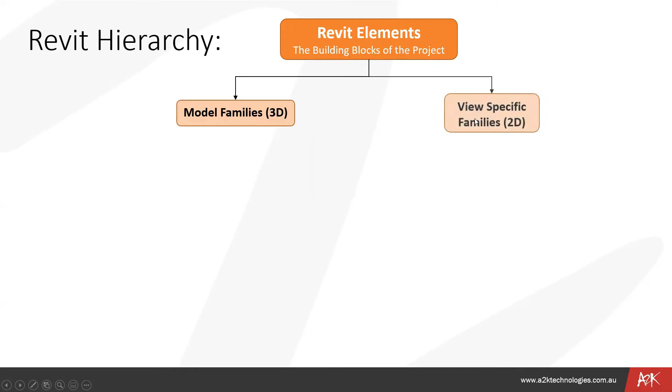Just to break that down a bit further in terms of what a Revit family is - basically anything that we would load into our projects, be it 3D or 2D, would ultimately in some way, shape, or form be referred to as a Revit family. Under your 3D components, we've got the system families, being walls, floors, roofs, ceilings, etc. The component families, which is what I would say most of my time is spent creating - these are your .rfa files that can be downloaded and plonked into your project.

Detail component families and annotation families like tags and symbols, etc. And then, bridging that gap between 3D and 2D, we also have the in-place families, which is kind of a standalone modeling space that you would use for specific project items.

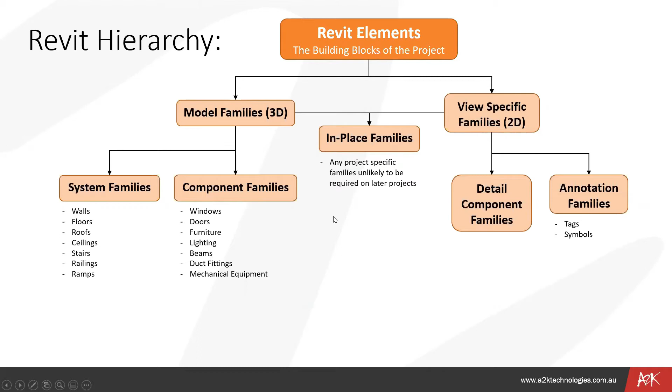I wouldn't say I spend too much time in the in-place families creation zone, but I suppose the core concepts of this consistent approach to content could very easily apply to all of this stuff.

Ultimately, everything that we create and put into our project brings in with it all of the data, all of the materials, all of the subcategories, if there are any, into this project. And that's important because Revit is essentially a visual database. So as with any database, if we put garbage in, we're going to get garbage out.

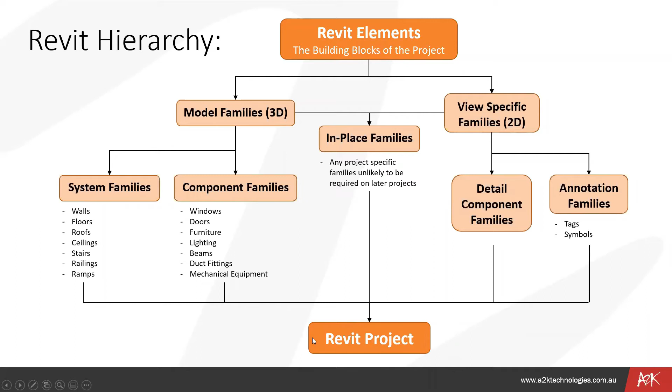That's something to consider, because a lot of different places that you'll go to for Revit content are created by a range of different people, with their own ideas of how to best do it. Some don't really care, and that gets dangerous because all of the back end stuff that lives in that content will ultimately come in and occupy space and memory in that project.

So when I'm talking about creation standards, there are a few real world applications, or examples I should say. This note here is just what I was touching on, as in any of the materials and the geometry, etc., that we have in the files we are putting in our projects, they ultimately end up in those projects. For that reason, it's important that we adopt and maintain a level of consistency when it comes to building these Revit components.

That might be region specific, it could be industry specific, or it could be specific to your design firm. It could be all three, it could be a combination. So it doesn't have to be an existing standard that's out there and available, it could be one that you create from scratch. It's just important that it is applied and adopted across the entire company.

Essentially, this is going to mitigate a lot of issues that you would see come time to populate your project with these objects. So when we're talking about consistency, this should be across a lot of things, and this is just a handful, not everything, obviously, but in terms of the level of detail, the quality of the content, the naming - that's quite important, and I'll show you why - the materials and any shared parameters. These are all things we should really have consistency across a complete library.

And then we have BIM-MEP AUS, which is more targeted at the services area - so this is like your HVAC, your plumbing, your electrical manufacturers. But needless to say, these have got standards that go along with the content that's built.

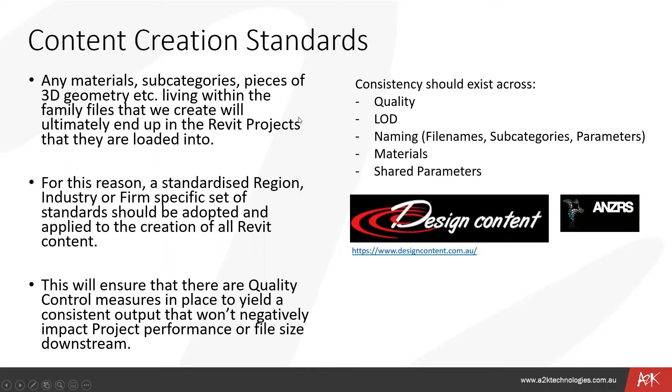For example, with design content we would use what's called the ANZRS, the Australia New Zealand Revit standards. With that, we have a range of shared parameters that live within the ANZRS ecosystem, and there's some guidelines around naming of files and best practices around content creation. BIM-MEP AUS, same thing - a separate shared parameter file, and if anyone's scratching their head about shared parameters, I'll dig into that shortly. But these are just a few examples of some existing standards that live out there.

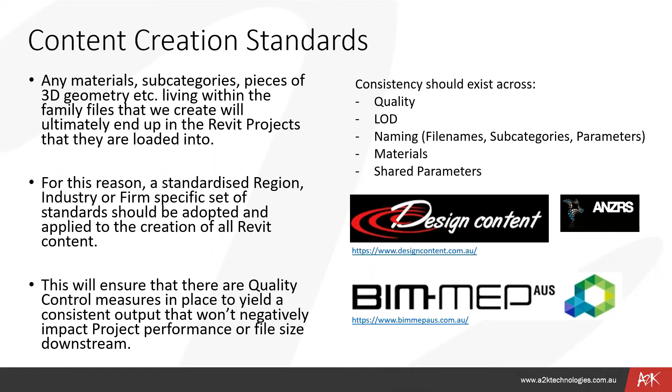But as I mentioned, this could be just as easily something that you would come up with yourself and batch apply to all of the content that comes out.

So what happens if content creation standards aren't applied to the families that you're creating and putting in your projects? Firstly, your projects will end up with a lot of unnecessary stuff loaded in. So this is going to ultimately impact your performance of your project and make the managing of the BIM a lot more difficult. You're just going to be swimming in more information, a lot of it unnecessary, and that becomes a problem downstream. You'll have difficulty finding families or family types or materials that exist within your project.

Again, it's just coming back to, well, firstly, naming of things can make that tricky, but also, the more you have in there, the more unnecessary stuff you've got in, the harder it is to find. Time is going to be wasted setting up and entering schedule information, and that sort of comes back to the shared parameters stuff, which I'll touch on. You won't get consistency or clear identity data in your documentation.

And you're going to end up wasting time graphically changing things in views just to get it to be readable. So rather than building it consistently and correctly from the outset, you're kind of going to have to do some sort of in-project fudging to make things look right, but they aren't necessarily right if someone was to open that file and have a look. So I'm guessing at least some of these are probably going to sound familiar to some of you out there.

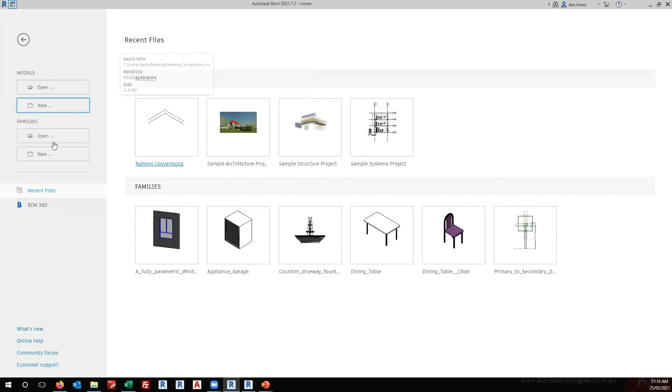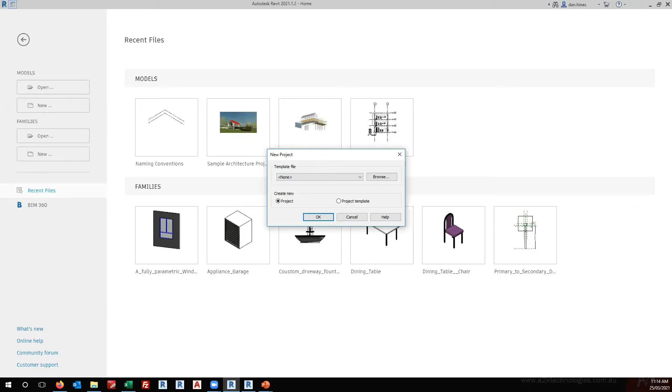So I'll just start a new project, and this is probably the best way to get a fairly good picture of what comes in with your families, because it is easy to just dump these in and sort of out of sight, out of mind. But when we start a new project, we have the option to select a template file, which I'm just going to say none, which is essentially going to bring in the bare bones. If I started it with an architectural out of the box template, it's going to bring in some walls, etc., which I don't want for the purposes of this test.

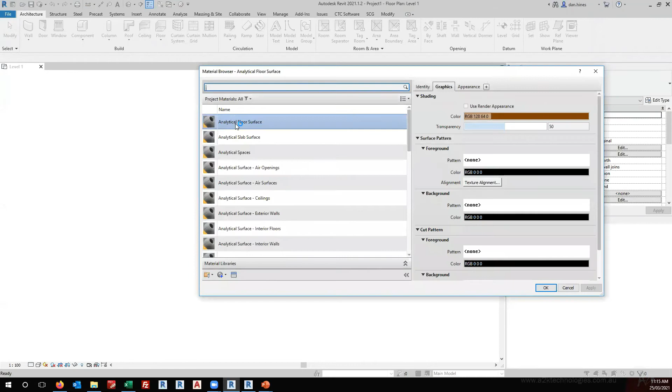What I'm then going to do is I'll just open the material editor here, and there is some stuff that still comes in even though I haven't selected a template, which I'm just going to delete. Hit OK. I'm then going to come into my Manage tab and purge unused, and I'll just do this a couple of times to make sure so I've got 0.

So what we've got here now is very much a bare bones project. There's no materials. There shouldn't be any subcategories. There shouldn't be any families other than the ones that have to be in here as placeholders. So this is kind of a good test to see and understand what is coming in with your content.

So I've just got a folder here, and this is just content that I've downloaded off an online resource. From the jump, we can see there's no real logical file naming here, which straight away is confusing to me because there's capitals, there's no structure to the file name, which we'll go into in further detail shortly. But the main thing I want to capture here is when I bring this into my project, and this shouldn't take very long because it should all be the correct version.

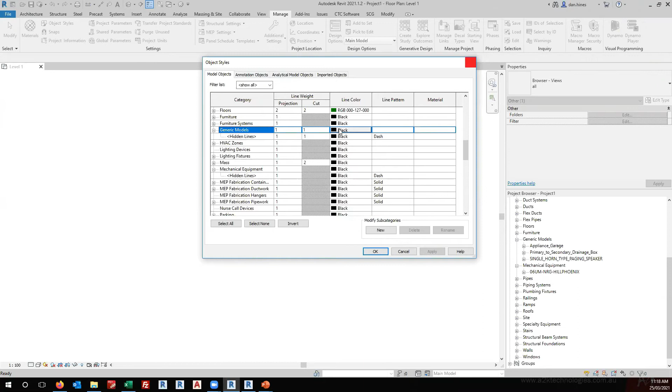is the object styles. So if you're ever wanting to test what is coming in with your families, and make sure that they're clean and only using what they need to, starting a new project without a template applied, purging everything out, including the materials that are living in the material editor, and then bringing in your content and seeing what comes in is a good way to tackle that.

So in terms of finding the families or those materials that exist within your project, sorry, I know there's going to be a bit of jumping to and from Revit here, so apologies in advance. So this is when a logical naming convention comes into play with not only your families, but anything. A good example of this, if I was to open this project here, as you saw in this folder, it's kind of a mess in terms of the file names.

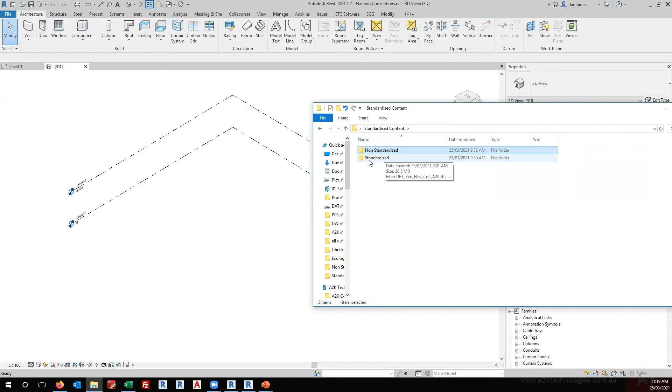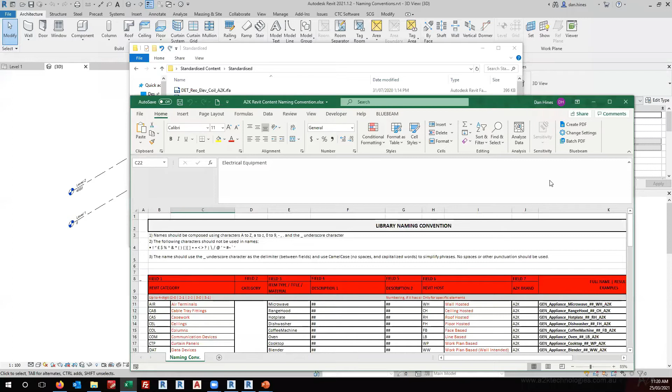So if I was to jump over to an example of some content that we've created here to do with the structural space, and I'll just go to details so we can actually see. We've developed, and I'd encourage you all to do the same if you don't already have one in place, a naming convention, which I'll share in my Excel here. So this is the way that we've used it. A general rule of thumb for naming content and materials is you typically want to work from most general to most specific, going from left to right. And I'll explain why shortly.

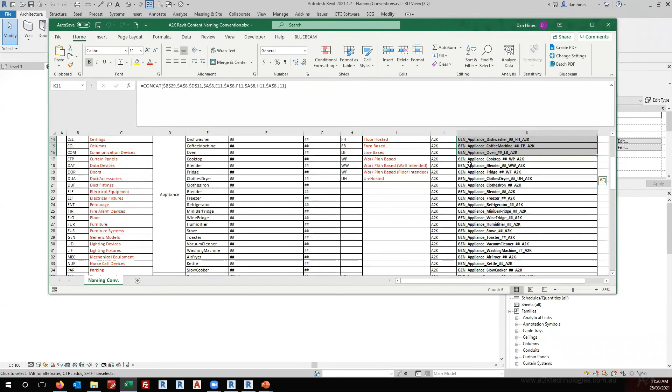But to break down our naming convention in this example, we typically start things off with the Revit category. That way, we're grouping by Revit category. We're then applying a subcategory, whether that is appliance or storage, and there's some examples over here. So a generic appliance, microwave. We have some descriptors if need be. They might not necessarily always need to be there. And then if you wanted to, you could also have hosting options, because some things may be face-based or line-based or work plane-based, etc.

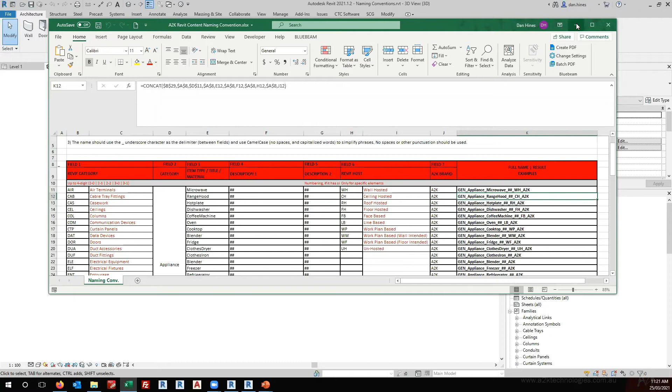So how this ends up working is in the context of a library that I've just dumped a whole bunch of content in, it starts to separate things out logically, as will it in the project browser, by firstly my category, which Revit should automatically do anyway, because we've got the predefined Revit categories that these should go into. But this is more for accessing and finding the content outside of Revit itself. This 3-digit category identifier is useful in that respect.

So we're starting from the Revit category. We're going across to whether it's Reo, slab, columns, beams. Within that, we have beams in situ, precast, steel, timber. So we're getting more and more specific as we go from left to right. And this is intentional because what we end up with is all of our beams sitting together, all of our steel beams sitting together, and then from there the individual profiles, which are unique. We've got all the timber beams sitting together, all the columns sit together, etc.

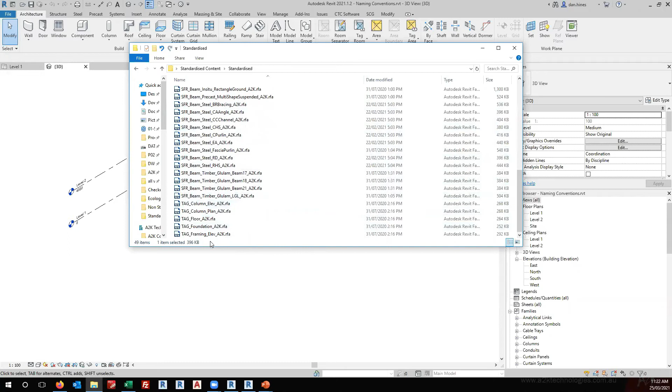So this is exactly the same for materials, as you saw back in, and I don't think I saved it, but did I keep it open? This project here. As you can see, there's no rhyme or reason as to how these materials have been named. So trying to go through and find a material could be pretty problematic and not necessarily a logical process.

If I was to come back in here where I've loaded in all that content we had in that standardized folder, the same principle applies in terms of naming the materials as with the families themselves, in that we have the overarching material type being concrete, metal, plastic, or wood in this case, and that one should not be there.

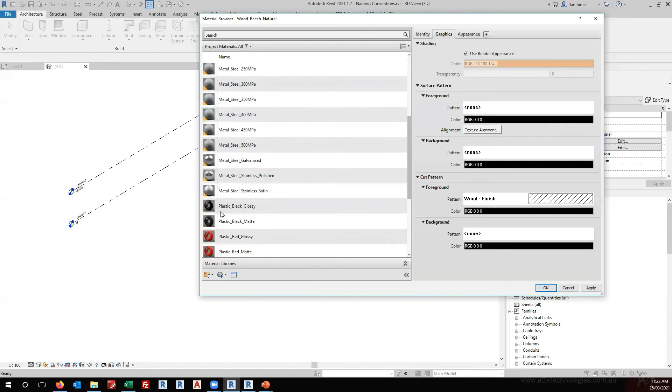Then within those categories, we've got whether that metal is aluminium, copper, steel, etc., and we get more granular as we go across. So how we end up with it is a really logical way of browsing our materials and our families, in that we just logically go from left to right, ultimately ending up with a finish of a specific color of a specific material. So that's sort of a useful tidbit.

And the other thing that you'll notice here, we're not using spaces, we're using underscores to separate the different things, and that's intentional as well. We want to limit the use of spaces if possible. This not only visually breaks it up, but I would recommend avoiding spaces at all if you can in terms of file naming or material naming.

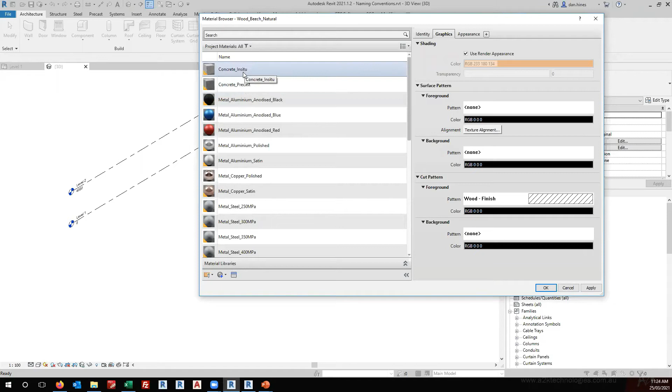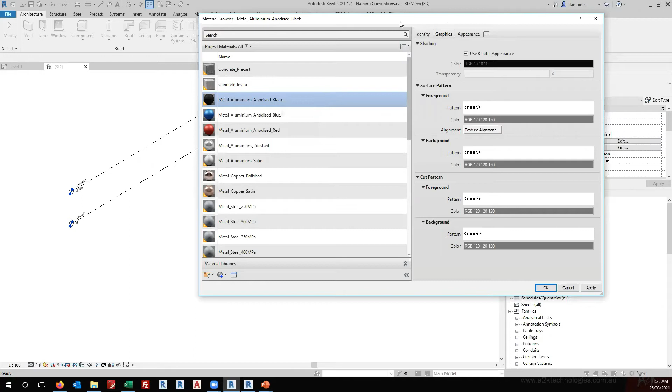And the reason that we've gone with an underscore, there's really not too much reason that you couldn't have a hyphen instead. I prefer an underscore only because, and this is probably more specific to the families themselves, there are situations where a specific brand name or product name has a hyphen in between two words, which can get a bit confusing in terms of distinguishing the separators of our name and what should be considered a hyphenated word. So I would lean towards using underscores as your separators, and then you can use a hyphen if need be for those hyphenated references in the file name.

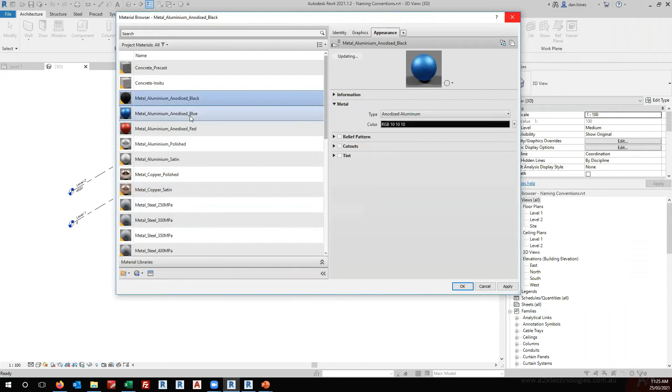So again, if I come through to the appearance asset that's assigned to these materials, I like to assign an appearance asset of the exact same name. So I've always got that link from appearance asset back to the material. I don't know if that's something that you guys prefer to do, but I find that's a safer way of doing things. If I'm changing things, I know that I'm changing the appearance asset attached to this specific material, and it's not having a knock-on effect on other things. The exception being, obviously, if you want to update a bunch of different materials, you could have a shared appearance asset that has a more generic name.

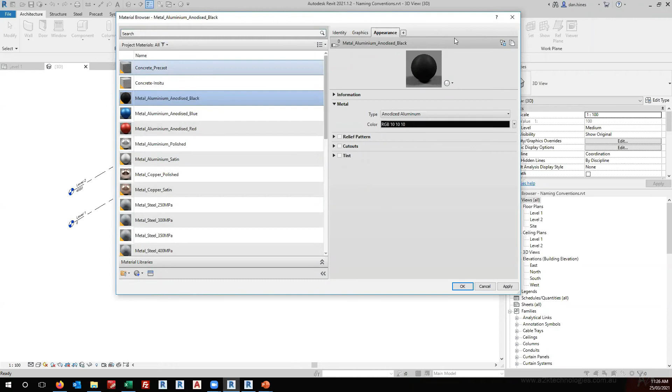So that's the logic with file names. Again, you may come up with something that works better for you, but my recommendation is certainly to work from left to right, generic to more specific. You're going to end up with something a lot cleaner in the project browser, but also in your Windows Explorer.

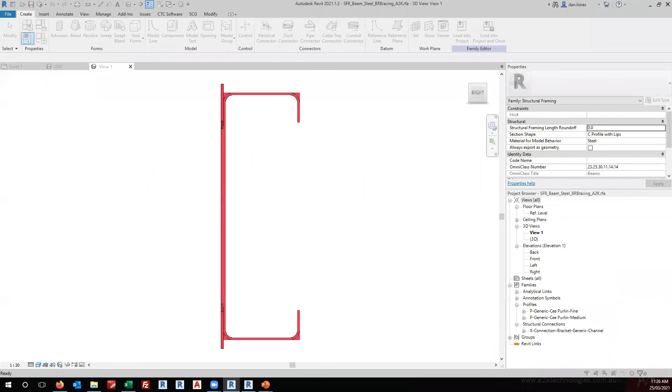The other thing to mention is not only the surface level names of the families, but when we get into the families themselves, we want consistency in terms of parameter naming and parameter grouping. So what I mean here is this range of structural parameters, in this case the volume and the weight that's being calculated off that. If we've got these specific parameters living in the structural parameter group for this beam, we would want that to be reflected in all beams. Typically, once you build one, you can use that as the skeleton to build out all your different profiles. But it is equally as important to not only have consistency at that surface naming level, but also within your parameters, structuring these in a logical way that makes sense.

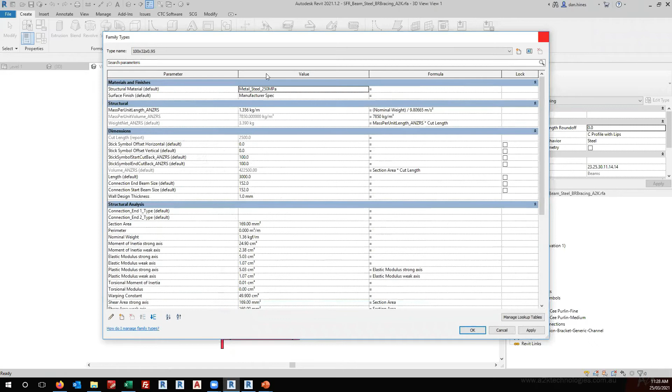I suppose just to highlight something here. These are a bunch of calculated parameters that are working in the background. I typically reserve this Other group for anything that's calculated that I just want out of the way, because it's at the end. You don't want to have to scroll through a whole bunch of calculated parameters to get to stuff that you want to access, like these stick symbol offsets, etc. So again, you may have your own approach, or you may adopt one that's better. But the main thing is that there is a procedure in place, and everyone's on board with that procedure when it comes to naming and structuring these families.

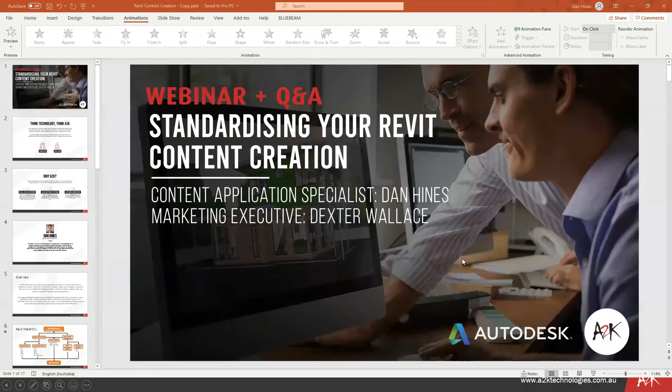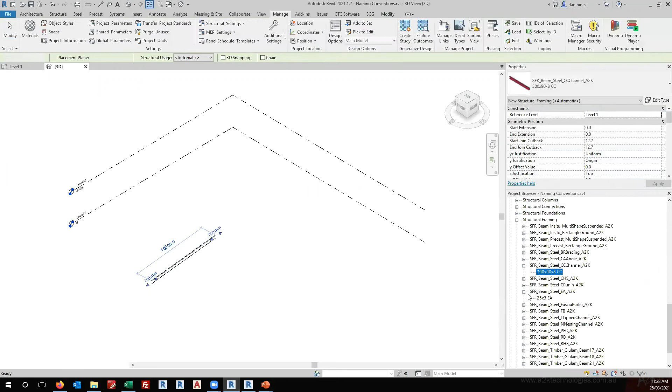Just jumping back into here, sorry. So when we talk about the scheduling of families, this is ultimately coming back to the shared parameter files. A lot of you have probably had exposure to shared parameter files, but just in case you haven't, what that essentially is, if I was to draw this beam here, this beam here, and maybe this one here. All right, so I'm just going to go ahead and do a structural framing schedule.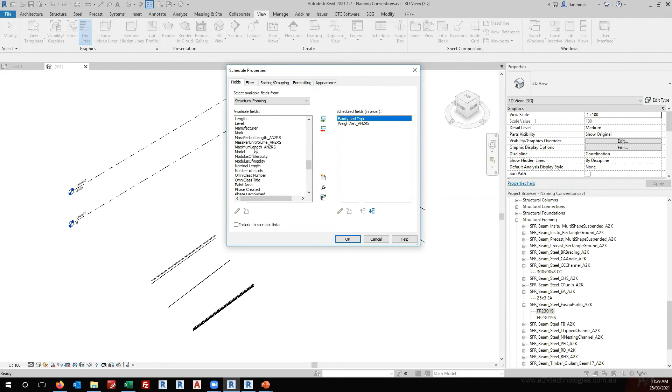And this brings up this schedule properties dialog. So essentially what we would end up with, and I know that these families are using the same shared parameters across the various families, which means if I was to, and I'm just trying to think which one, let me grab, let's just go weight. And I'll just go family and type. Okay.

So because this is using this specific ANZRS weight net parameter, and I guess to show you what a shared parameter file looks like, if you're wondering, it is a bit scary when you see it under the hood, but it does make perfect sense. So let me go to, all right. So this is the ANZRS. So it essentially opens as a text file, and sorry, it's opening on my other screen here, so I'll just bring it across. So this is what it looks like when we open it, essentially.

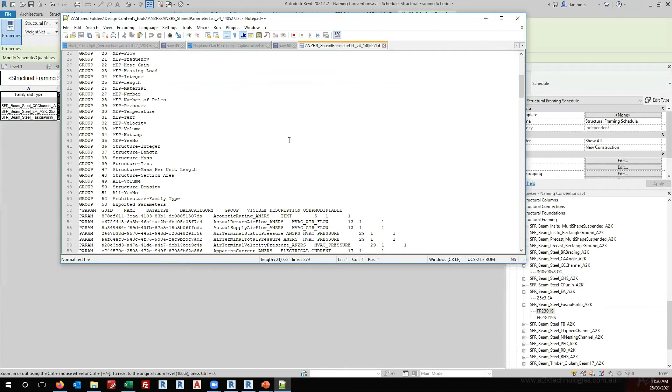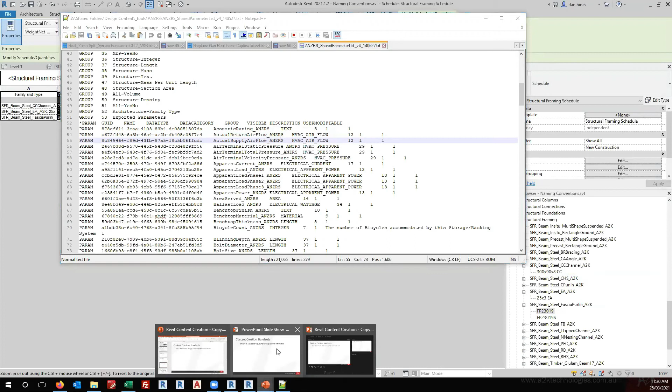And each row reflects a shared parameter. So if you're wondering also what a shared parameter is, I'll just jump into here. So basically we've got a couple of different parameters in Revit that we can assign to various things in our content. So family, shared, and system parameters. These system parameters are typically the ones that come in the template. So these are built in. You can't add them or remove them.

Family parameters are ones that we add, but we don't necessarily need to schedule them or what have you. So all of those calculator values that we were seeing before, they'd be family parameters. I don't want to schedule or tag those. And only these shared parameters and system parameters can be scheduled or tagged. So that's important. So when you're dealing with things like width, height, depth, material, these are critical conditions of most objects that go into your project.

So if we were talking about width, for example, we wouldn't want a million different width shared parameters, each with their own unique identifier. So this GUID here, which is like a unique set of numbers, is what tells us that when I load, say, this acoustic rating parameter into a family using this shared parameter file, if I then go into another file and load that same parameter, because it's using the same ID, when it comes time to generate my schedule, it's not going to report

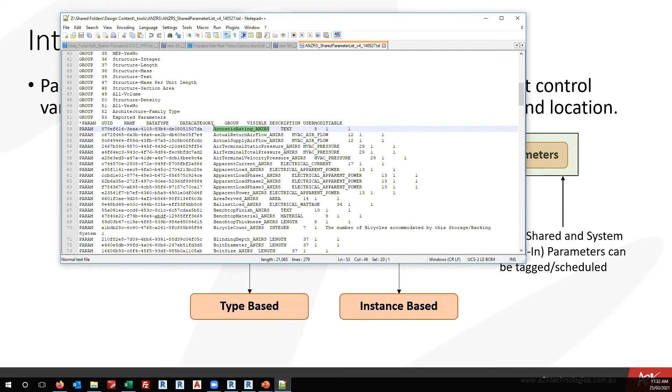potentially 10, 20 different acoustic rating parameters for me to schedule, which becomes a major nightmare because you don't know what parameters are assigned to what. So this is just a cleaner way to do it.

By the way, for anyone wondering, to create a shared parameter file, it's not as complex as doing anything in this environment. You actually have a dedicated shared parameter dialog through Revit, which is a lot more user-friendly, where you can create your own and just add parameters. And again, that's something that you may already have in-house, or if not, you should potentially think about creating a firm-specific shared parameter file to adopt when you're building any content.

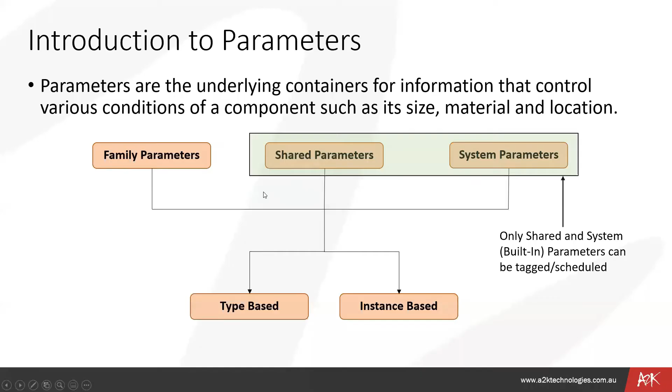So hopefully that gives some context on the importance of the parameters that we use, so the grouping, but also defining whether it's a family or a shared parameter. That's also very important. And you'll waste time graphically changing things in all of the views in your project in order to make them as readable as possible. So there's a few things that we can do here, right?

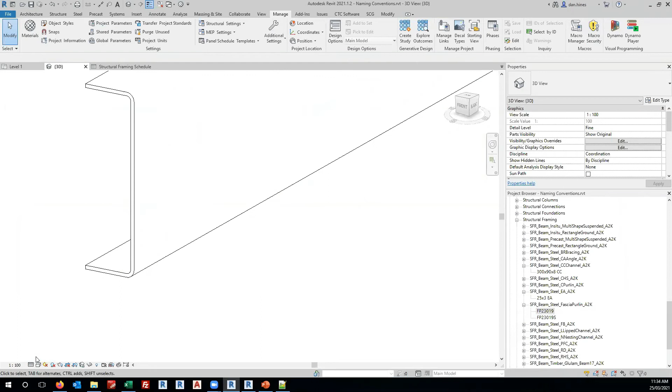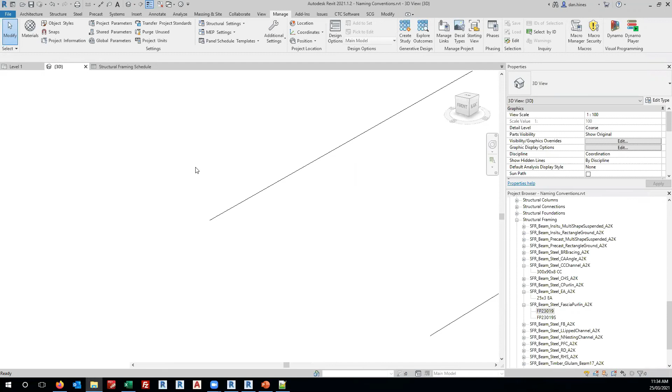So taking these beams, for example, if I was to come in here, and this one might be a bad example, but Revit has these inbuilt detail levels, coarse, medium, and fine. Typically how we treat this, and what I might do, sorry, is I'll just grab one of those non-standardized ones so we can do a bit of a side-by-side here. So I'm just dragging in one that I know is particularly big.

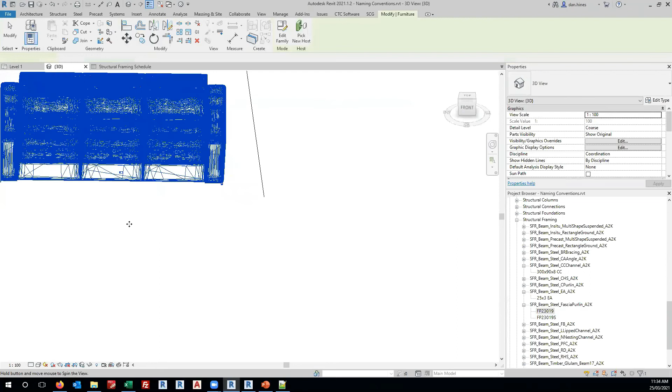But what you can see when it comes to consistency is if I was to come back into my standardized folder and grab, so we've got a few beams, but let's just say maybe this laser printer. All right, cool. So basically when we, oh, sorry, did that come in? Yeah, there it is.

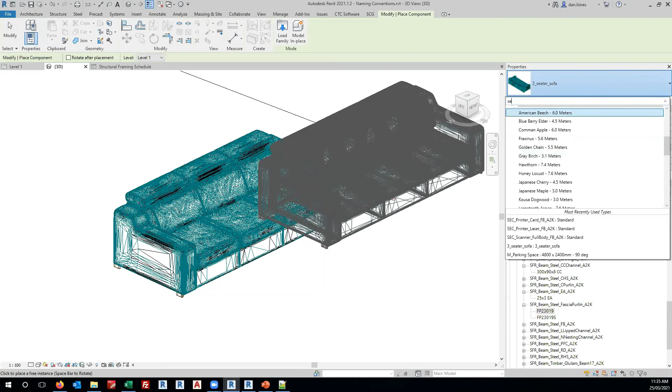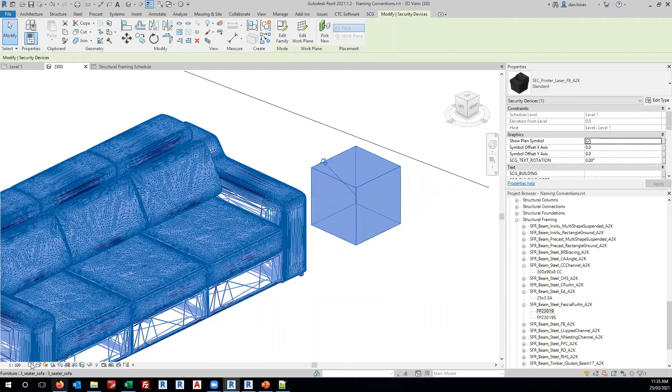So when we're building content, it is a good idea to integrate some level of detail control using these 3 inbuilt levels. So as you can see, this sofa, we're at coarse detail level here, and we're seeing absolutely everything there is to see on this sofa, including the beveled edges of the cushions and everything else.

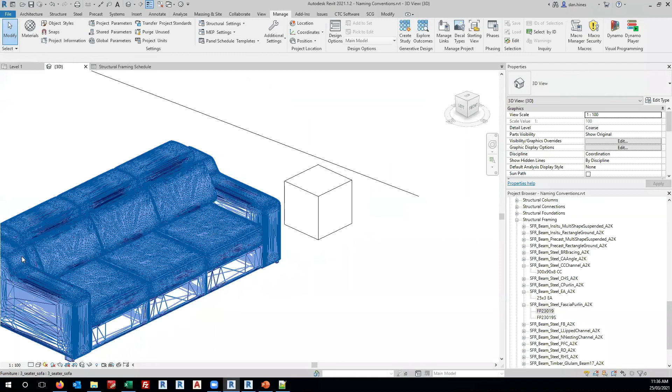Now, I know that that's a result of this thing not being natively modeled in Revit, which is a problem in itself. But if this was natively modeled in Revit, this could be greatly simplified to show something like this, where it's just taking up an overall depth, width, and height. Because at coarse, that's typically all we're concerned about.

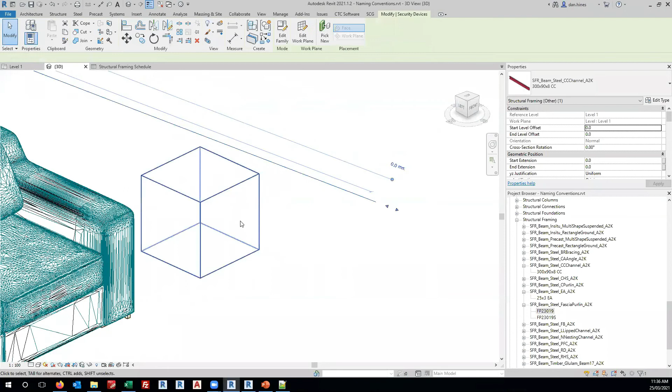So you can see with the beam, we're not even seeing anything in terms of a profile. It's just giving me the location and the length. This printer is just giving me where it is and how much space it takes up. As we go through to medium, we start to get more identifying features come through. As we go to fine, we get some other stuff that makes it a bit more pleasant to the eye if we were to render it or something like that.

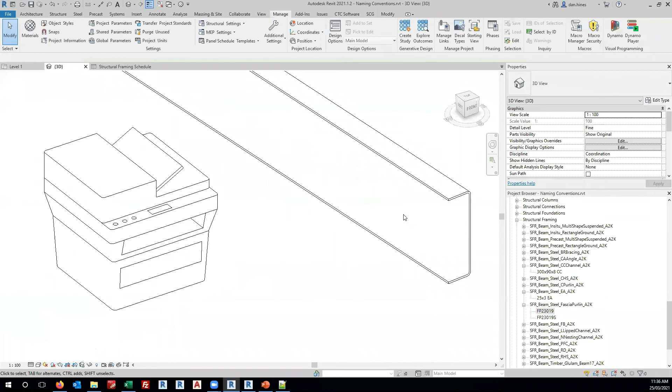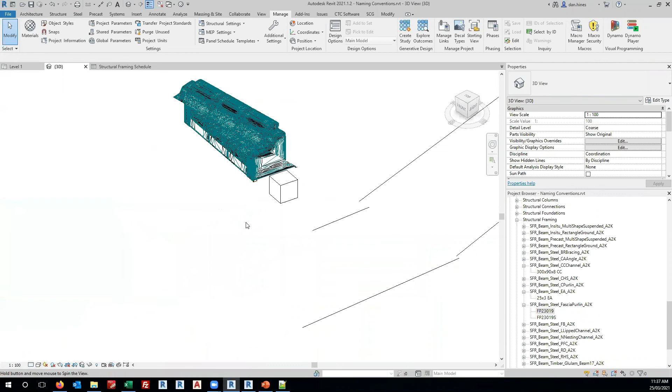And with the beam, we're starting to see the filleted edges, the filleted corners, where we're not with medium. So this couch is staying the exact same highly detailed model in all views, which becomes a problem when I want to rotate around my view, say in coarse mode, which is typically just for coordination and checking that things are where they need to be. I don't want to have to deal with something like that couch needing to be calculated in the background as Revit's doing its thing.

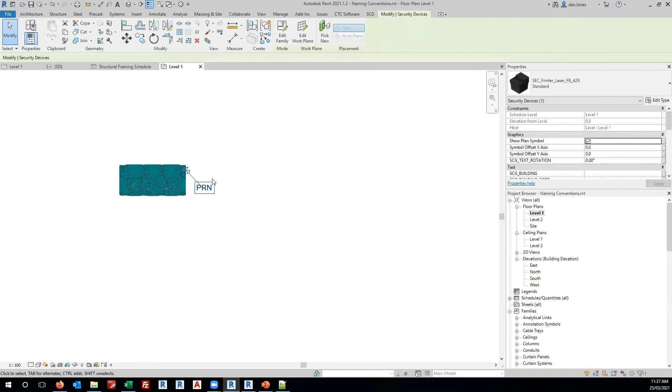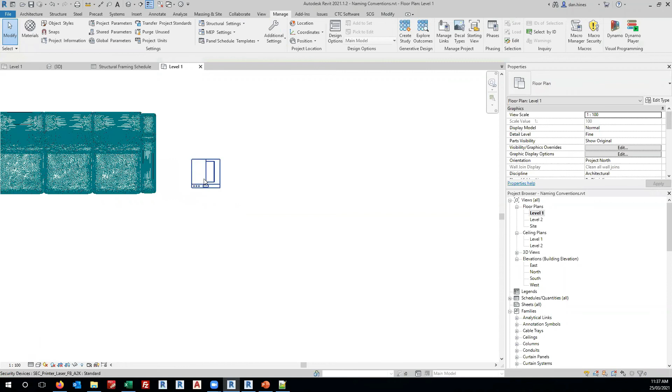So I think it's about having that level of consistency when it comes to deciding what gets shown at not only various detail levels, but at various views. So for example, if I was to jump back to a floor plan, in this particular example, we're seeing a symbol for the printer. We're not actually seeing the physical printer. In fact, if we were to go to a fine detail level, we can see the 3D geometry; at medium and coarse, this family's just been elected to show a symbol.

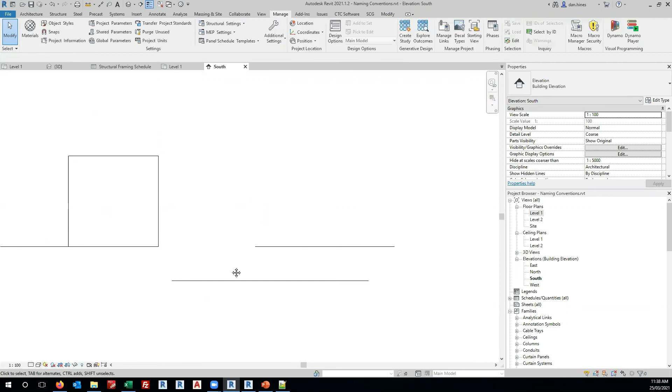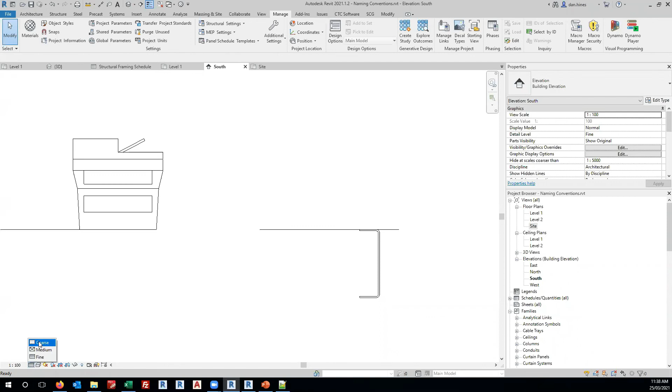So it's not just that we can show geometry at certain detail levels, but we can also have that combined with certain views as well. So if I was to look at this elevation, and sorry, I haven't drawn that beam especially straight, so let me fix that up. Just want to show that there is a symbolic representation at coarse to give us the actual shape of that. So yeah, we can combine what's being seen at any given detail level and in any given view, which is very useful.

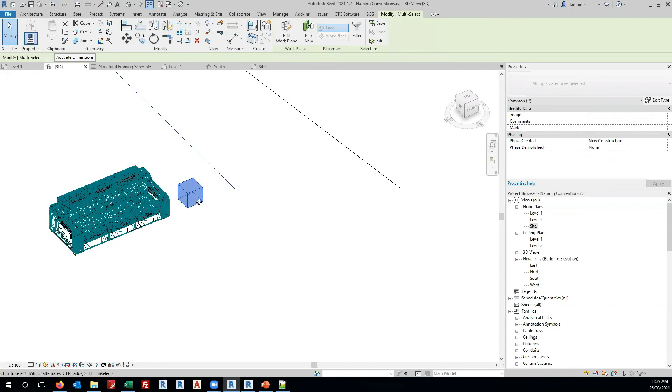And as mentioned, we don't want a situation like this where certain stuff has been built to a specific detail level, and then we just have something like this that's a bit of a shock to the system when it sits alongside that other stuff. So I just want to recap on the process when it comes to mapping out the creation of certain Revit content.

Questions to ask yourself are, do I need to schedule or quantify certain aspects of it? In which case, if the answer is yes, is there an available built-in parameter? As you know, there is for, say, manufacturer, URL. These are predefined built-in parameters that it would make sense to use. If there's not, you would need to have a shared parameter that is reflecting that value and have that available in the family. How many of these will be placed in a project?

So this is coming back to that detail level thing. If it's something like a light switch that you may have hundreds of in a project, does it make sense to go down to modeling the fixing points? I would say no, because Revit is a building design software. It's not a fabrication solution. So typically we would just model what we see, and even then largely focus on the metadata that goes in the background. It is important to have it look like the real product, so you can identify it and say that's a light switch.

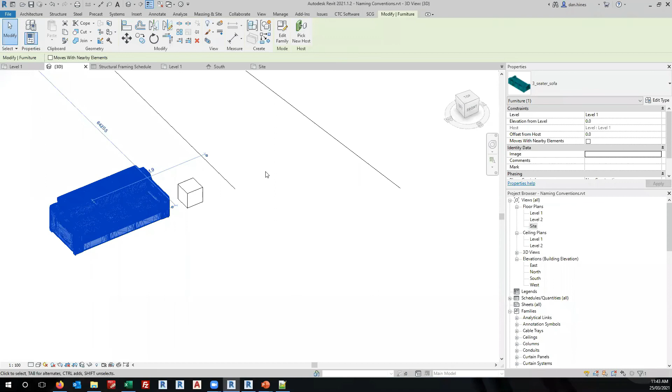Just thinking something else I could show you in the interim, because I did mention we'd have a quick look at system families.

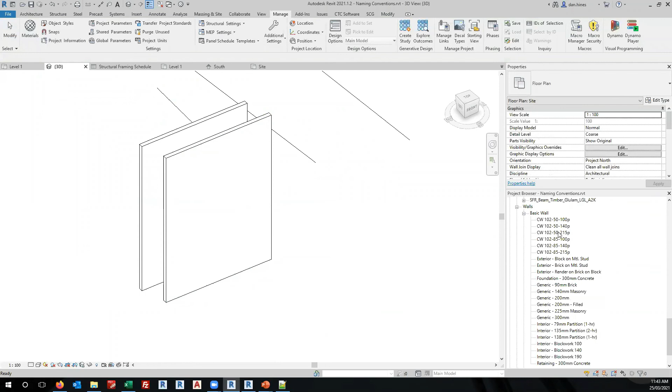These behave in a bit of a different way. So if I had a basic wall, and let's just say I renamed this one to be, I don't know, test wall. Okay. So a good way to manage...

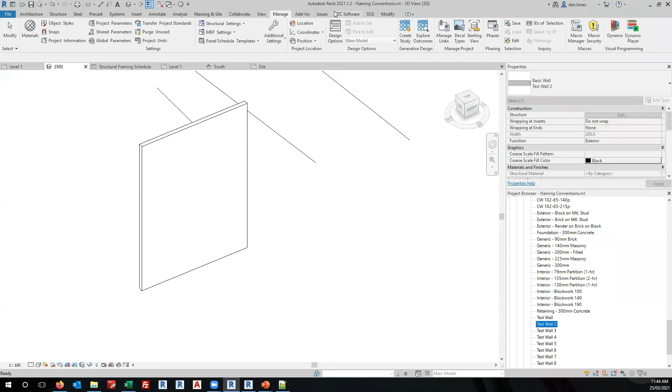Metadata inside system families - if I had one version and wanted to create a bunch of different color options for this particular wall type, I'd duplicate these out, and then I've got... let me come into here. Okay, sorry, take 2. All right, let me just dock this properly.

All right, I'll just rename this one as test, and I'm just going to duplicate a whole bunch of times here.

I don't know if anyone's spent much time updating values in a system family, but it can be quite cumbersome when you've got to dig into the type properties, which is just opened here, and manipulate the metadata that comes in here. It can be a bit cumbersome because you could miss things. So a useful approach...

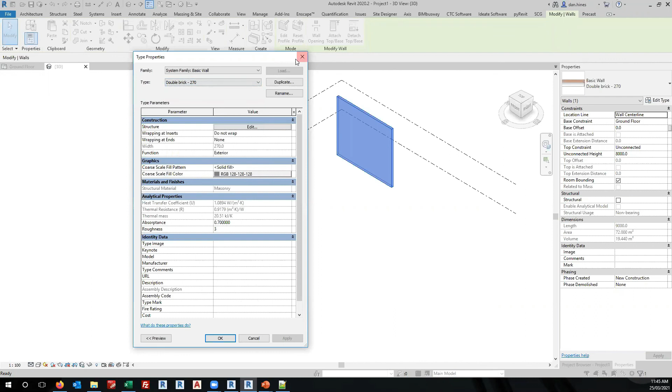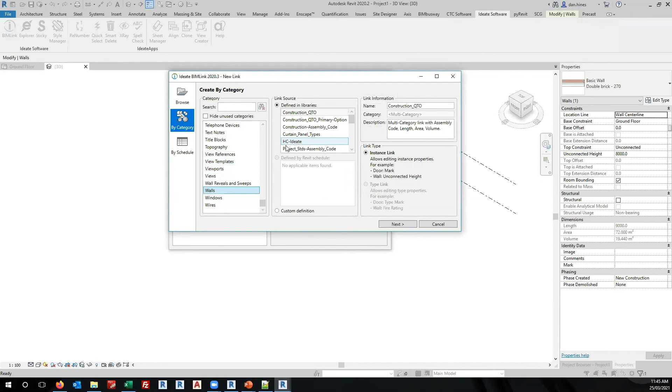Is using something like BIMLink. This is a plugin that sits within Revit. All right, so new - I can go by category, walls. I can select the type link.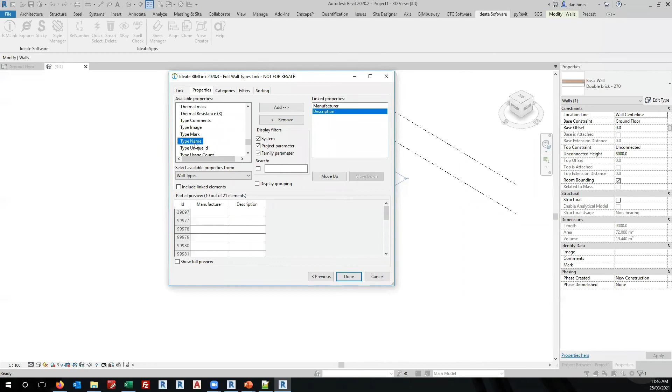All right, so here I'm cracking into the parameters that I want to change. Let's just say manufacturer. By the way, I could have custom parameters, project parameters assigned to this particular wall category, maybe description, type name, and I'll just go done. I can then export that.

That'll do. Open that. And now what we're doing is - you can imagine I could have a whole bunch of parameters, but I'm not really concerned with these, because these are just the stuff that was in there. So let me delete that out.

So these are the walls that I've just created. I can give these a unique name. And I know this is probably a silly rename I'm giving it, but basically it takes out a lot of the errors that may come from trying to manage this in Revit itself. So manufacturer, that could be anything. Description, this could be unique, but you're also harnessing the power of Excel.

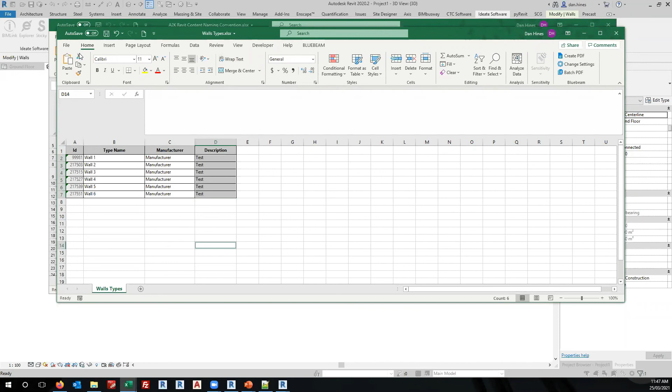So you've got autofill functionality, and if I save that and come back to my project, I can import wall types. Oh geez, I've got to think about which one - this one, I think. Oh no.

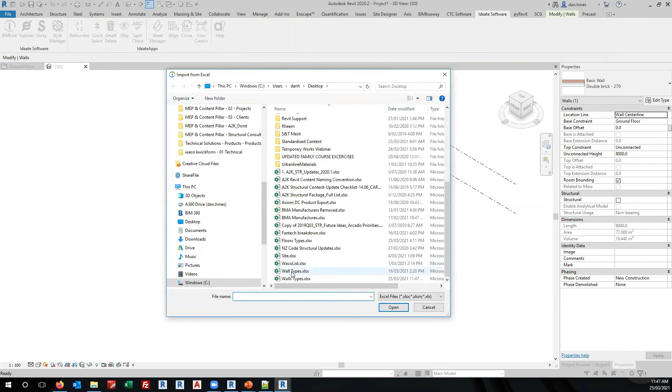Sorry, import wall types. Cool. So this is just telling me these values are going to change. Hit import and jump back over to my project browser.

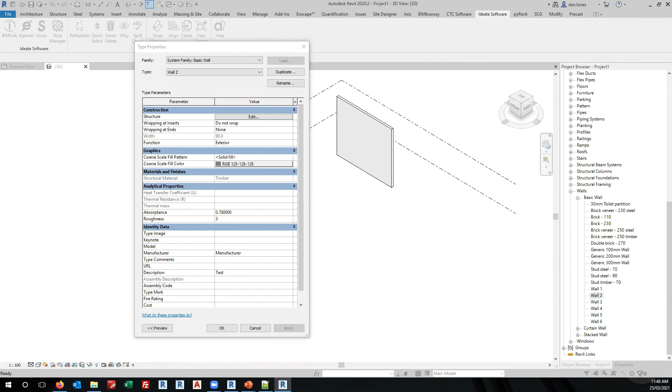Okay, sorry, Salvi, I can see a question. In previous versions of Revit, there's some rubbish that we bring to the project that we couldn't remove even by purging it. Is the latest version now able to purge all that rubbish? So the short answer is there is likely to be stuff that lives in the background.

There is a tool that I've got, which is a free tool, Revit Lookup. This is even more of a peek behind the curtain of the stuff that comes in with your components that you bring in. What this allows you to do is even sort of say, I guess, shared parameters.

These shared parameters, I wouldn't necessarily ever know that they live in the project. But what I can do is, if you've got also, right, material appearance assets, these are all living in here, even though I don't necessarily have a material that's associated to it.

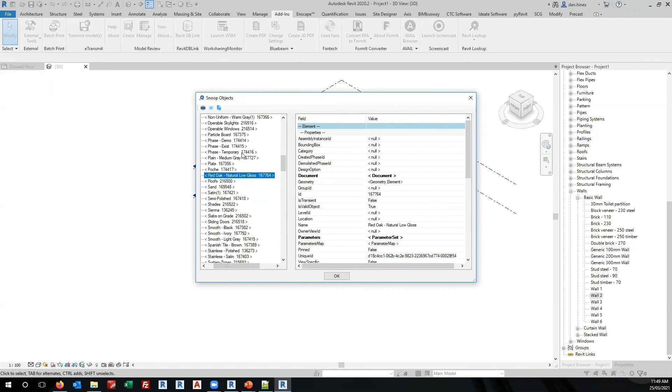But it's also kind of cool because it gives me the unique ID number for every one of these elements, which means that if I've got a whole bunch of stuff living way in the background, I can take that ID number and feed it into manage, select by ID, basically enter that number, and Revit will select that element in the background, and then if I hit delete, it will go.

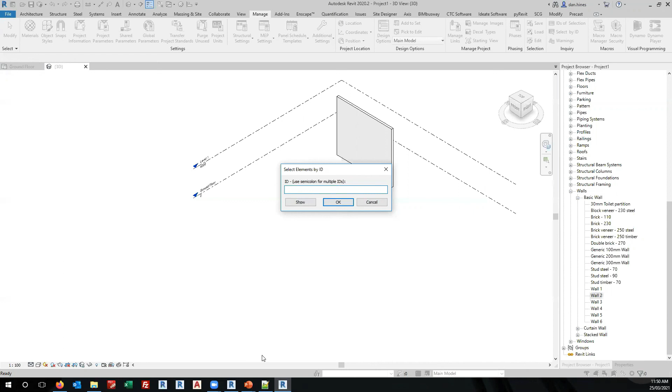I don't know if there's other tools out there that do that, but that's Revit Lookup, which is a really handy tool that cracks down a bit further than your typical purge would. I don't know if that helps at all. I don't think 2021 has more improved purging capabilities, but that's sort of my recommendation there. So I don't know if there's any questions there. Doesn't seem like.

Save a Revit project file with material images embedded in, so you don't need to relink. Yeah, that's a good question. So I'm just reading this one, which is if there's a way to save a Revit project with material images embedded. The short answer is, unfortunately, not. That's something that we're up against, particularly in 2021.

But yes, it would involve - it does live as a sort of XREF where you would need to. So how we would typically transmit a project of walls that has their own textures is we would have a dedicated folder with all the images required, alongside a set of instructions, and then it would simply be zipped up with the corresponding project file. So, unfortunately, the images themselves need to live and be sent with the Revit file. It would be nice if they would be embedded, but sadly, no.

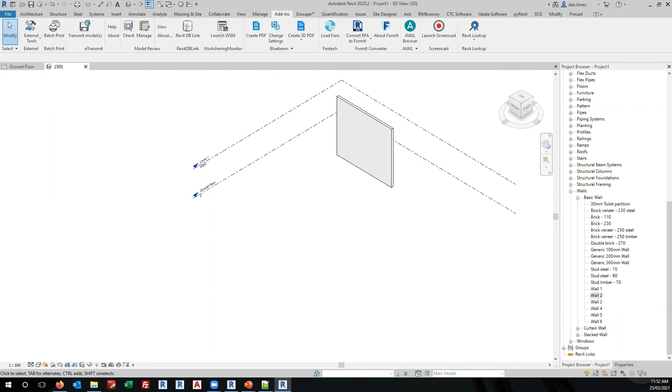So I don't know if there's anything else. No. Sounds like it might be all the questions. I'll just flick over to here.